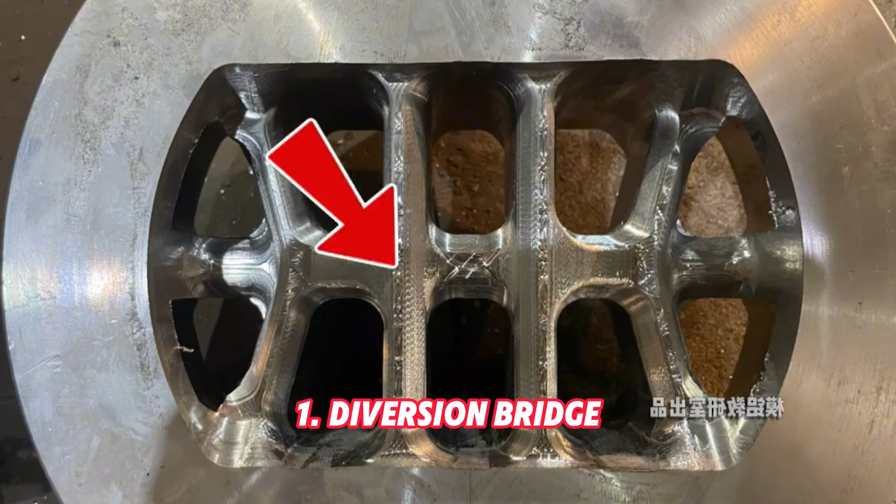First, the diversion bridge. The shunt bridge is in the mold, the key structure connecting the upper and lower molds. Its main function is to support the mold while withstanding tremendous pressure.

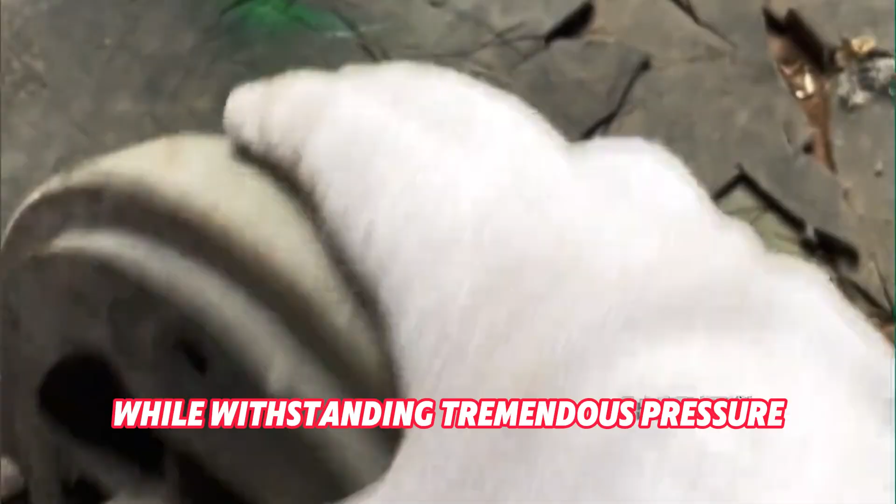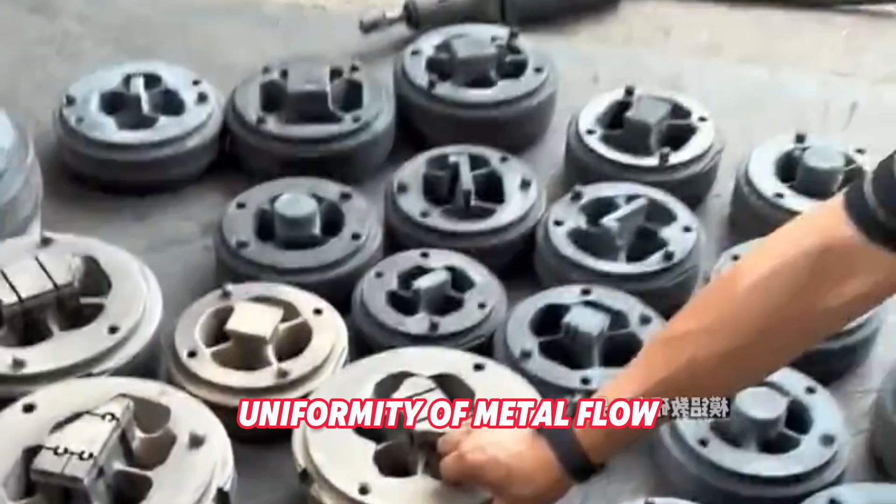The aluminum billet enters the mold through the shunt. Its design directly affects the uniformity of metal flow. The number of diversion bridges, their shape and size, are determined according to the profile's shape and size. Generally, the shape is more regular.

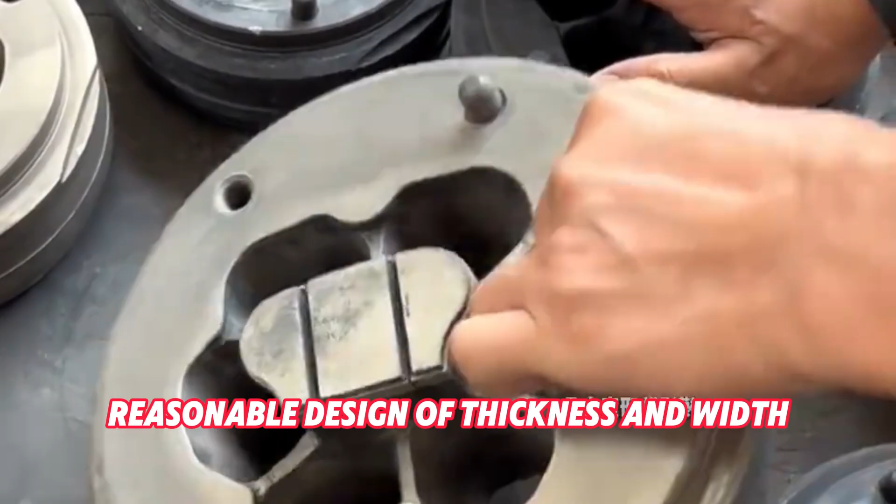Reasonable design of thickness and width is needed, avoiding being too thick, which causes metal flow resistance to be too large, or too thin, which is unable to handle stress.

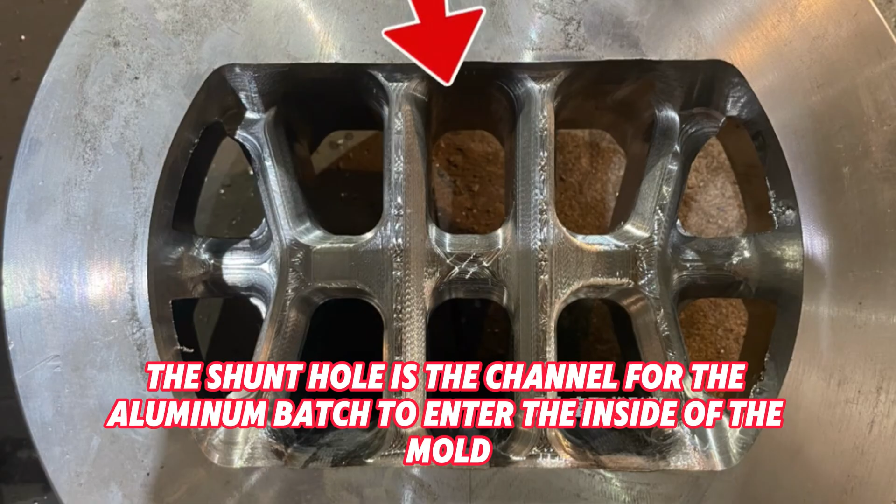Second, the diversion hole. The shunt hole is the channel for the aluminum billet to enter the inside of the mold. In the hollow profile mold, it goes over the diversion bridge, and the metal, after being shunted, guides around the core.

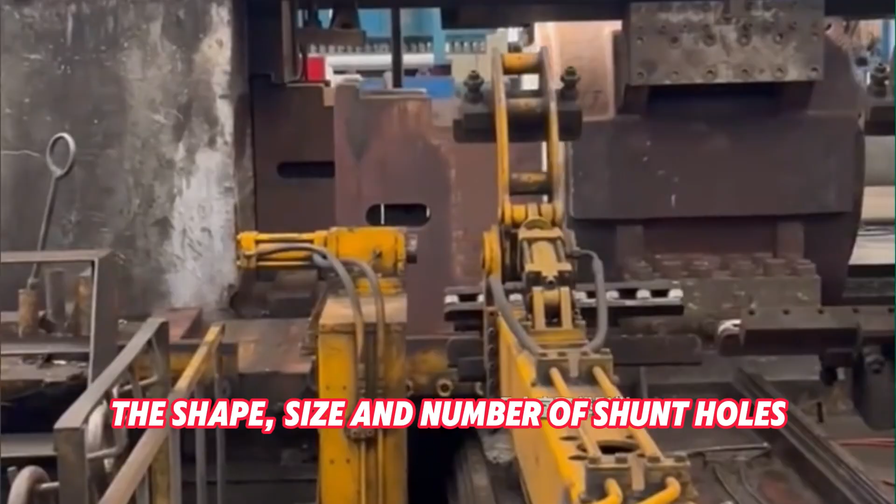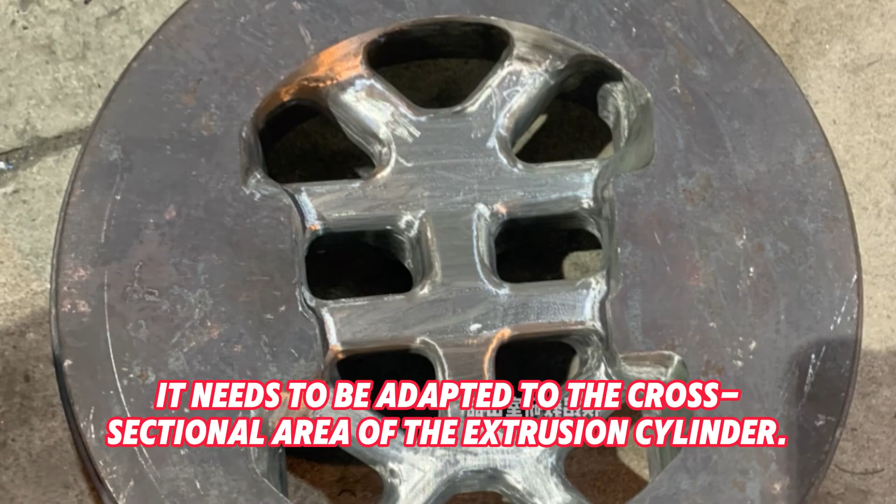The shape, size, and number of shunt holes are essential for the uniformity of metal flow. Usually fan-shaped or rectangular, their area needs to be adapted to the cross-sectional area of the extrusion cylinder to make sure the metal enters smoothly, and the transition of the hole should be smooth.

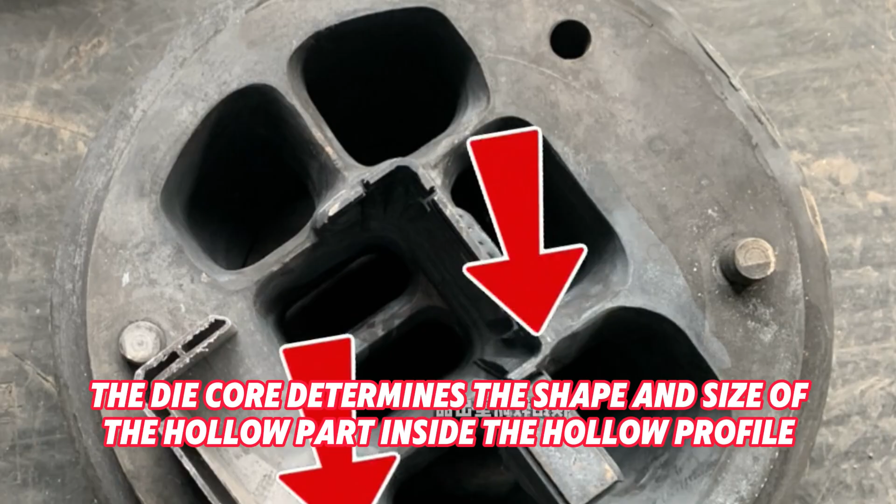Third, the core. The die core determines the shape and size of the hollow part inside the hollow profile. When squeezed, metal flows around the die core and eventually forms a hollow profile.

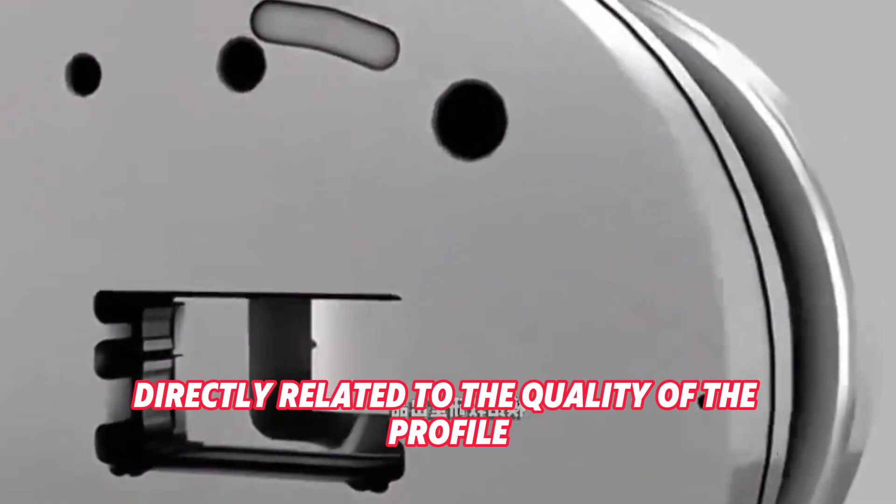Core shape accuracy and surface quality are directly related to the quality of the profile. It is usually made of high-strength alloy steel, and the surface needs to be polished.

The fixing method must make sure that when subjected to extrusion force, no displacement or deformation occurs.

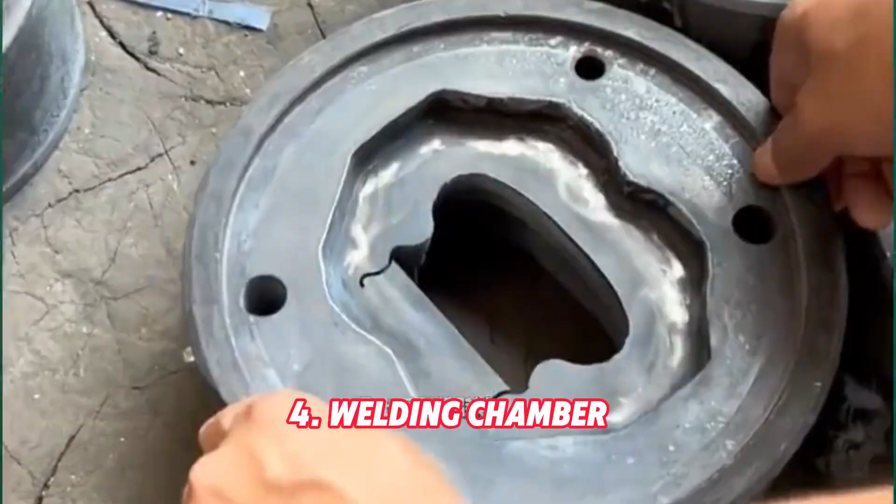Fourth, the welding chamber. The welding chamber is the area where the metals reconverge after being shunted. In hollow profile extrusion, here the metals rejoin and weld.

Its volume and shape depend on the profile size and shape, with smooth transitions designed at entrances and exits. The surface roughness is controlled within the appropriate range to ensure that the metal is fully welded, avoiding weld defects.

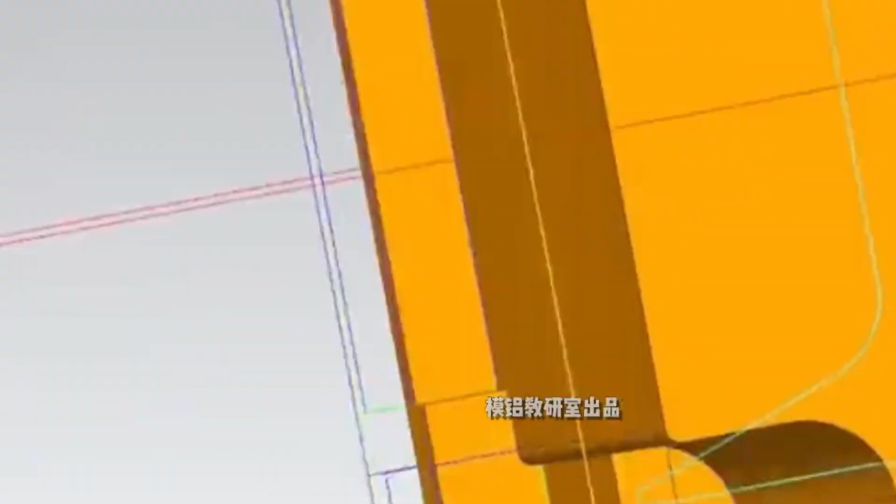Fifth, the work belt. The working belt is located at the exit of the mold cavity. It is an important part of controlling metal flow speed and profile dimensional accuracy.

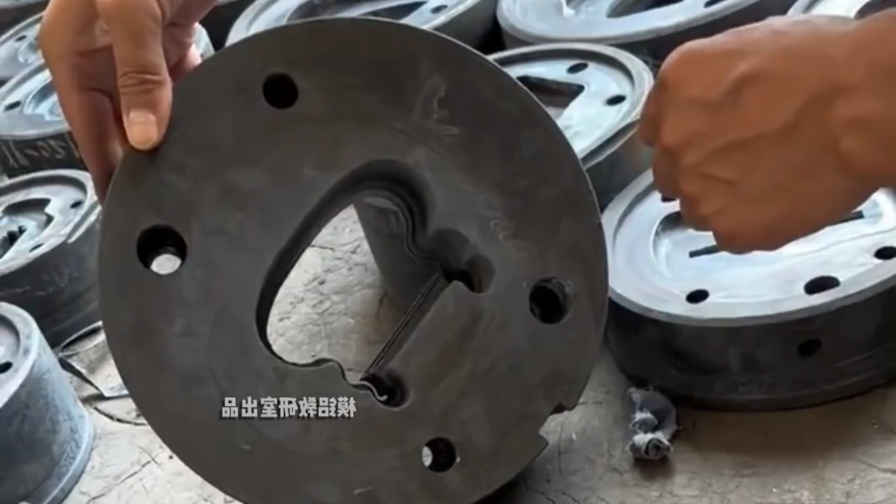By adjusting the length and shape of the working belt at different parts, metal flow velocity can be balanced across the section of the profile. The surface roughness of the working belt is low, and the outlet shape matches the final shape of the profile, ensuring smooth extrusion of profiles.

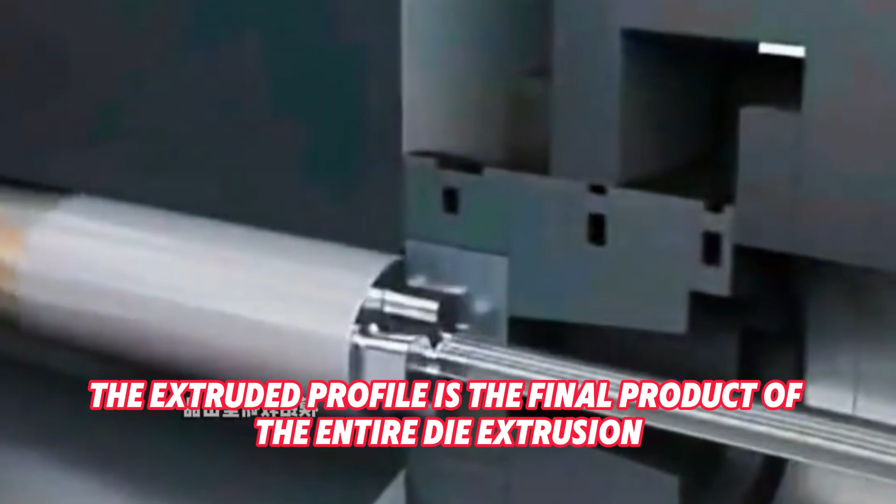Sixth, the extruded profile. The extruded profile is the final product of the entire die extrusion. The quality of the profile, including shape, size, and surface quality, all depends on the reasonable design of the above parts of the mold.

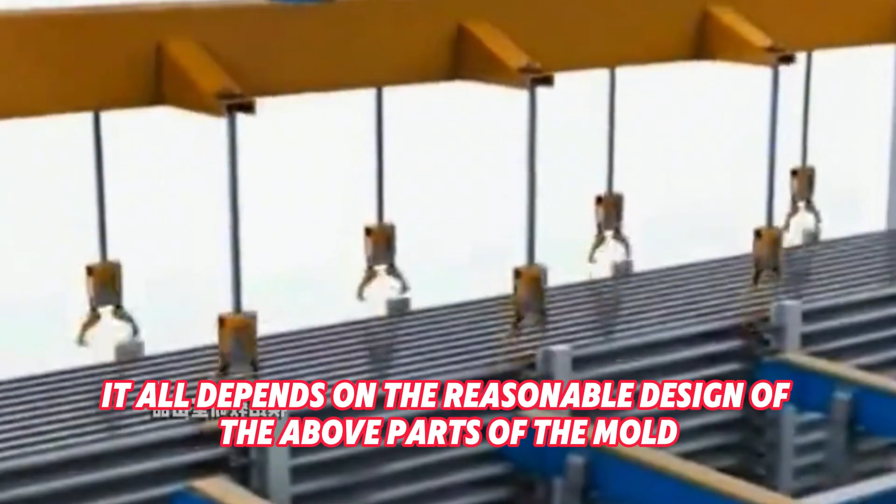Precision machining and effective maintenance must be fully considered in the process of mold design and use, to ensure the extruded profile meets high-quality standards.